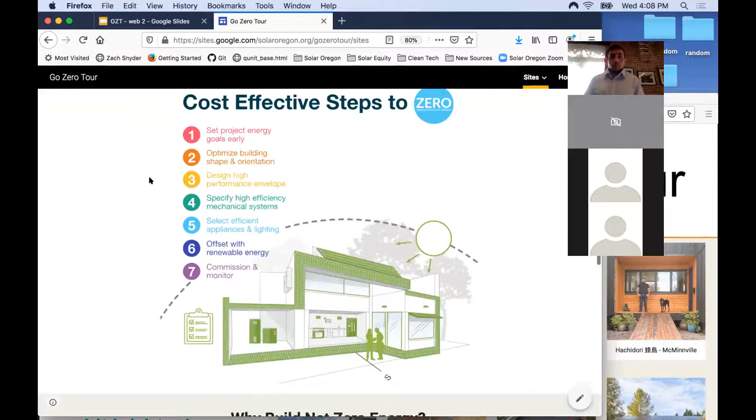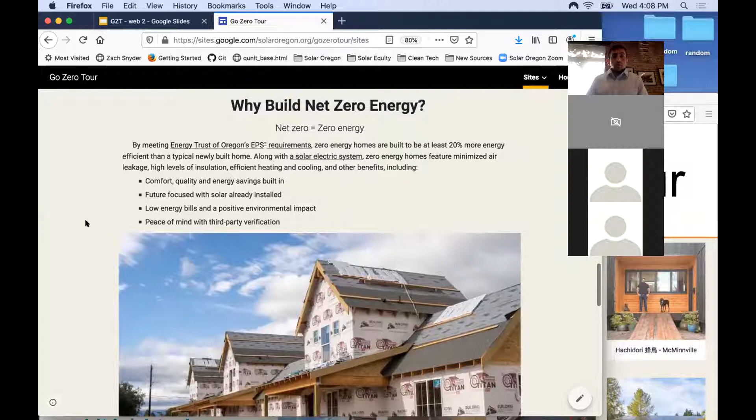So on the site, please check it out. Click on one of the tour sites to see what goes into this site. What are the technical specifications that make this zero energy? Watch the tour videos. We had an amazing videographer who we worked with this year, Keelan Booth, who put together a great visual guide to all of these sites. And you can also read the narratives as written by the site owners. So make sure you check that out.

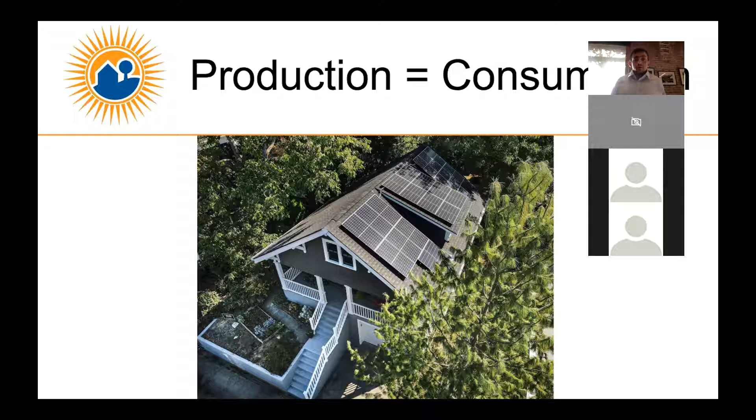What are the benefits of zero energy? One is that, of course, this may be the first one, the fore of your mind, is that when you're using solar to produce your energy and you're producing as much energy as you need, you're cutting out your carbon footprint. And of course, there's that environmental benefit. But there are other really great benefits that you may not think of top of mind when you think of zero energy. One of them is that it can be a really great investment.

A lot of people experience high energy burden. They're spending upwards of 100 or 200, sometimes 400, sometimes many hundreds of dollars per month on energy because they have older, less efficient appliances, because they have a home that is not air sealed in a way that allows them to reduce their energy consumption. So weatherization is often a great low-hanging fruit for saving money month after month. Solar is a great investment because it offsets what you're consuming from your utilities. So it offsets your utility costs, and over a long period of time can be a way to build wealth.

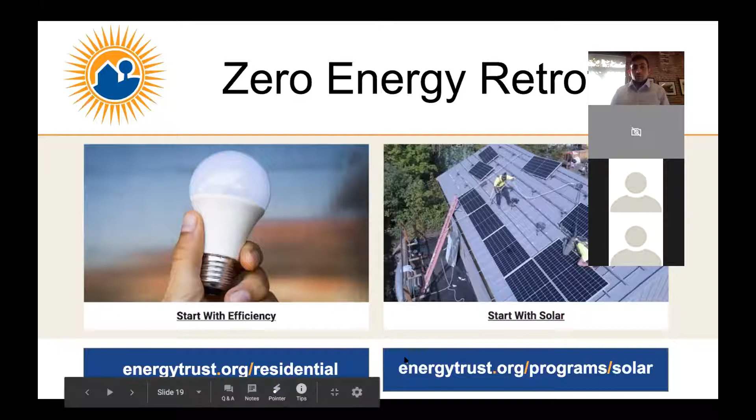And of course, when you are starting a project from the ground up, whether you're a builder or you're a homeowner seeking a new home, the design choices that you make from the ground up can have a huge impact on how much energy that uses. And it's really easy to design a new home that is zero energy. You can start with the insulation in the walls, how the home's constructed, making sure you have roof area for solar on a part of the roof that receives sun.

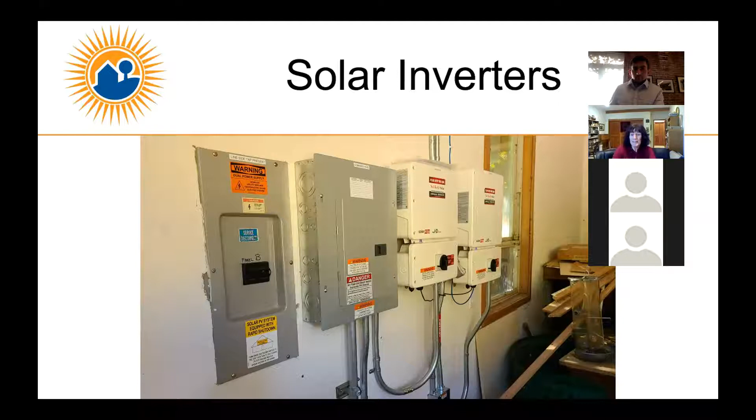And then right after that, the electrician stayed on and we went to the heating part of it and changed over everything in about 3 weeks. It was very easy. They did a lot of air sealing and duct work and crawl space work and put in a heat pump, and the 2 water heaters were changed out for a very large water heater that was run by a heat pump. And there were 2 Mitsubishi ducted mini split systems for the heating and an electrical upgrade for the stove. I did go to an all electric stove, and it was just a very smooth project.

I think now I'll probably look at going to batteries in about 5 years and see if they're more efficient and more economical. And I check my app all the time on my phone to see how much energy we're generating. And it turns out that even in the couple of weeks where we had a lot of smoke and where we've had rain, it's always generating electricity. And the app is very good in telling us also that we have offset well over 4 tons of carbon dioxide since August 6th, which is when the system went live.

Neil Kelly had PGE come in and they put in a bidirectional net zero meter, a monitor system. And that tells us when we're paying them and when we're storing electricity in the bank. And after getting my first PGE bills after the system was fully functional, I discovered that we were making perhaps 3 times as much energy as we were using. And this was at the end of the summer. So I'll continue to look at the PGE bills for a long time to see how it works.

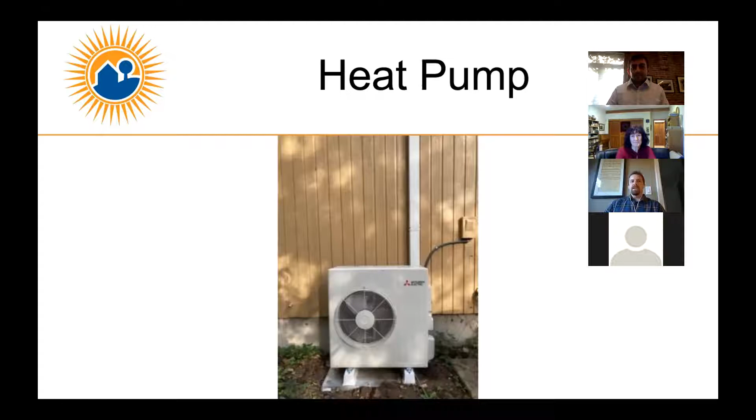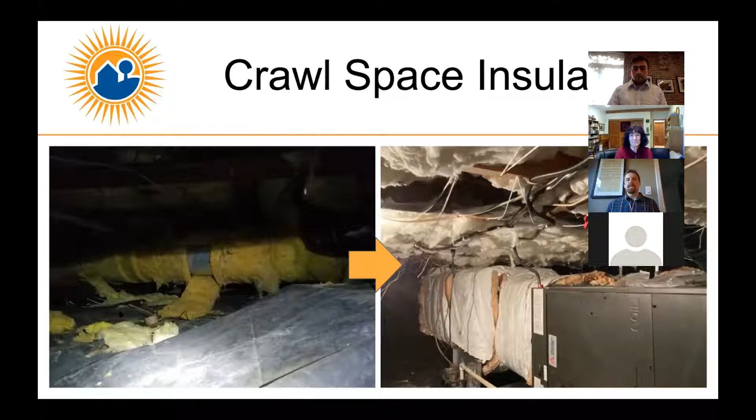And the insulation wasn't too bad. We did re-insulate the crawl space because the insulation was not in contact with the subfloor. So we got some energy savings out of the insulation there. We touched up the attic insulation a tiny bit, did some air sealing as well. So it's a multi-pronged approach. Home performance always is, and every house is different. So getting a home performance contractor in to help you create a roadmap of sorts for how to reduce the energy is definitely a big part of going net zero.

So that's kind of the home performance side of things. A lot of the low-hanging fruit was the heat pump water heater and focusing on the ducts. Those were kind of the big 3 where we saved a lot of the energy. And we were able to take the modeled expected energy consumption and cut it more than in half. I think we cut something like close to 60% of the energy consumption off of Gay's overall expected energy consumption. So that's remarkable. And then from there, we started designing a solar array.

And in Gay's case, she had a really big roof. I think the lowest spot was about 73% TSRF all the way up to about 80% TSRF. And TSRF is just the total solar resource fraction. So a really, really good roof. It's really large, as you can see, made for a relatively easy install of the solar array. And so we ended up putting in a 20.48 kilowatt solar array. We used SILFAB modules that are made in Washington.

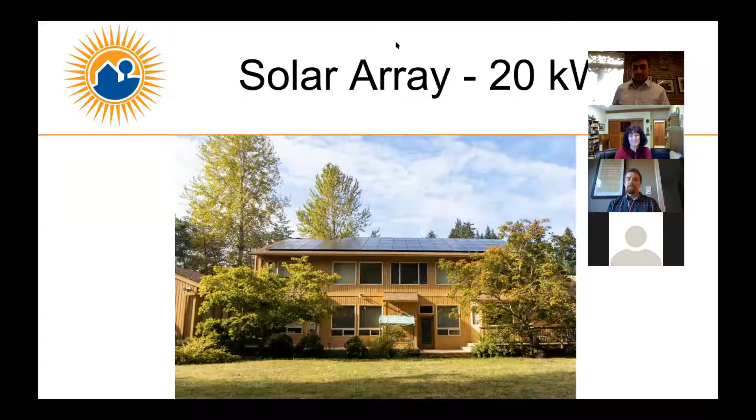And we put in 2 SolarEdge inverters. The SolarEdge inverters have the power optimizers, so each module is effectively isolated from the rest of the string. So if you get shading on one part of the array, it doesn't impact the production on the rest of the array. So an efficient heating system, the ductwork and the water heaters, and then a large solar array. And we were able to take Gay's overall energy consumption from, I think it was 212 million BTUs, down to 0. I mean, 0 energy consumption. So really cool project. Gay was really easy to work with, and it was a lot of fun to be a part of this.

That's amazing. Gay and Tyler, thank you so much. This, to me, is such an inspirational project, and I'm so glad to have it on the tour, because not too many years ago, zero energy was kind of a pioneering thing. And to see a home that was not designed originally with energy efficiency in mind, a little bit of an older home, not super old, but a big home, go zero energy, and it works from a homeowner perspective. It works technically. Nothing was invented for this project. It's all out-of-the-box solutions.

Off to the side, there's our heat pumps for both the house and the ADU. The windows are all triple paned with a U of 0.19. The most interesting thing about the house was how we built it. We didn't use traditional construction methodology at all. We use SIP panels, which are rigid insulation sheathed between 7/16 OSB for most of the walls.

Where there are structural components, they do have structural wood in there to support the ridge beams and other components. In the house, we have both 8-inch walls and 6-inch walls. The 8-inch walls are R42 and the 6-inch walls are R38. The roof is also SIP panels, 12 inches thick, and they are an R52.

We are heating and cooling the house with ductless mini splits. There are 5 mini splits in the main house and 1 in the ADU. And we're getting our makeup air and taking our exhaust air out with an ERV. And we have 5 heads in the house, each in each bedroom and 2 in the main room.

And as we go over, again, we're all electric. So we are also using an induction stove, which by comparison is far superior now to gas. It's more controllable, significantly more so. As far as cost, there's a lot of conjecture that building net zero or energy efficient is anywhere from 5 to 10% more expensive.

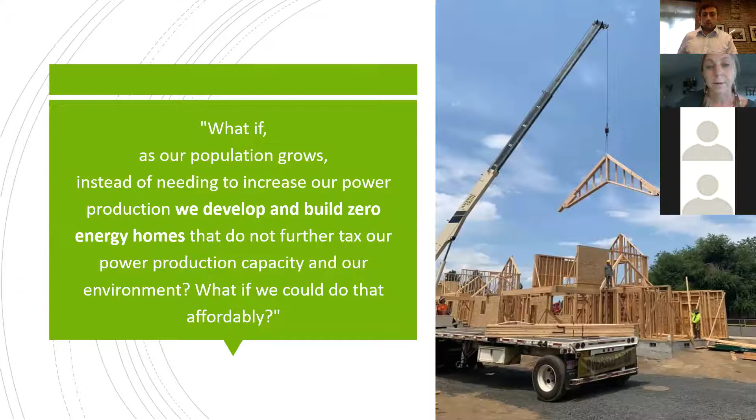In one of my energy generation classes, we were examining energy usage as it relates to buildings. When you look at consumption versus population increase over time, it begs the question: what if, as our population grows, instead of needing to increase our power production, we can build zero energy homes that don't further tax the power production capacity and our environment? We took this a step further and said, what if we could do that affordably?

So what are the benefits of energy efficiency to the individual? Zach covered some good benefits of energy efficiency, and I think these probably pertain more to the individual and the household occupant. So obviously there's a reduced or no energy bill. Another big one is that it insulates from future increases in energy costs. We are lucky in Oregon to have pretty low energy rates for our power, but that's not always going to be the case. And health and well-being.

So as I said, the third leg to our stool is equity. The lens we're looking at equity in, as it pertains to energy, is really in the context of income and energy equity. So we're asking the question, should these benefits of energy efficiency be afforded only to those with means? Or should zero energy be the standard sustainable way we develop housing for all humans? I personally think that zero energy should be the base building code.

And my co-founder in this venture, when we decided to create Kôr, we didn't start with the affordability side. We started with the zero energy side. And he said, well, I will only do this if it's not a product for the elite, if it's something that our peers can afford, who are teachers and essential workers, that kind of thing. We didn't want to just build these communities that only a small amount of the people could afford.

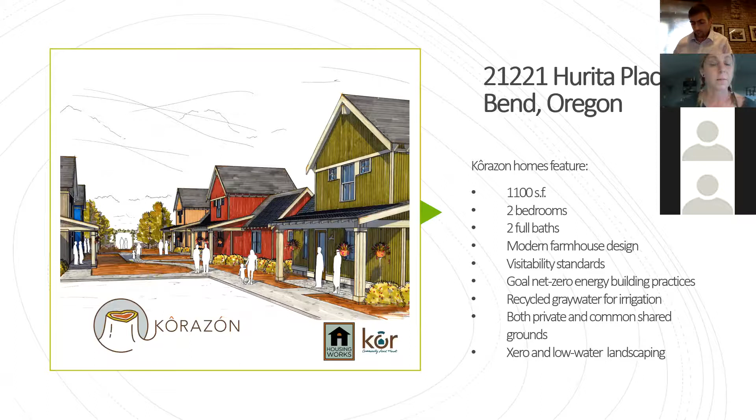The community was developed using a cottage cluster code, so it's centered around a common area that is shared, and we're hoping to water the majority of that with gray water reuse, in combination with some xero and low water landscaping. So how are we getting to zero? This is a picture, I think, from end of last week. So we have our roofing on, and we're starting insulation on Monday.

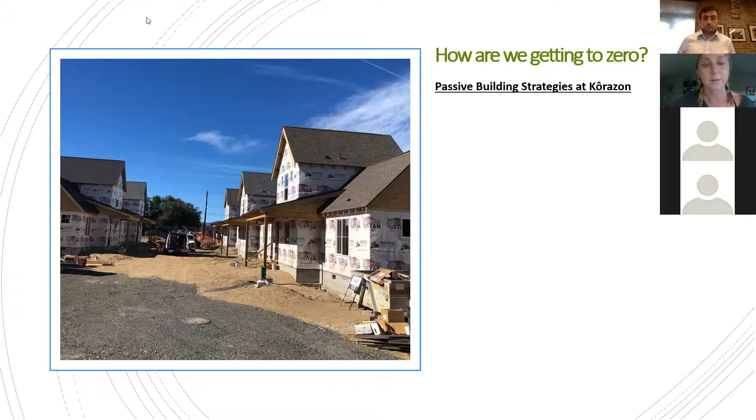We really started our quest to zero by doing as many passive things as we could, because we knew that these are the things that are going to last the life of the home. And as the organization that stewards the homes and the land in perpetuity, it's in everyone's best interest to start with passive. So for our wall systems, we went with staggered stud framing. For our insulation, that gives us about an R31. We started out in our energy modeling with higher insulation in the walls; we were looking at about 1.5 inches of spray foam and then blow in.

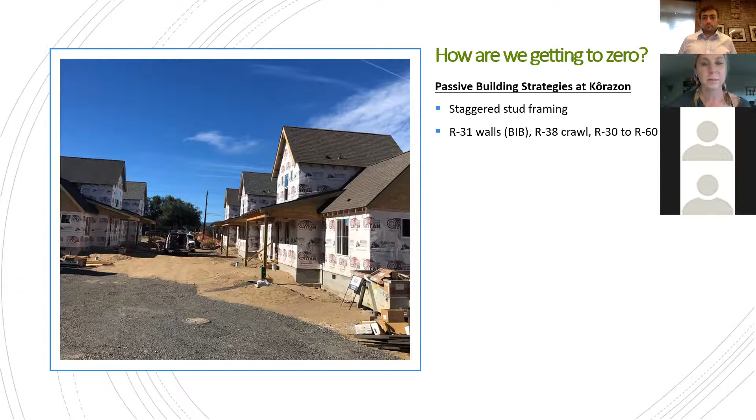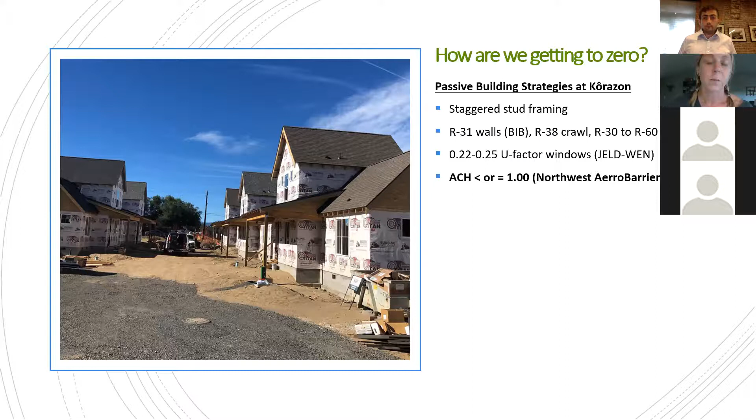After modeling the AeroBarrier product and where that put our air changes per hour, thank you, Perry, for the introduction to the AeroBarrier product, we were incredibly surprised at how much less insulation we needed to get to our zero energy goals, just by making a tight home. We have windows that are of U value 0.22 to 0.25. With AeroBarrier, we've modeled 1 air change per hour, but our goal is for less.

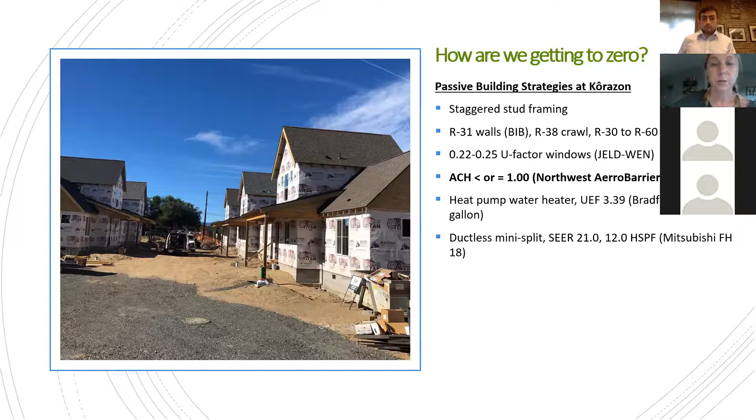We're using heat pump hot water heaters and ductless mini splits, and because of the small nature of the homes and that they are so insulated, we worked with Bruce Sullivan from Base Zero and Mitsubishi to establish that we really only needed a one-headed system as long as we had a way to transport that air to the different spaces. We have in-wall ERV systems, 100% LED lighting, and energy efficient appliances. For our active system, everything we could not cover through our passive strategies, we have a 5.12 kilowatt solar array that will go on the roofs.

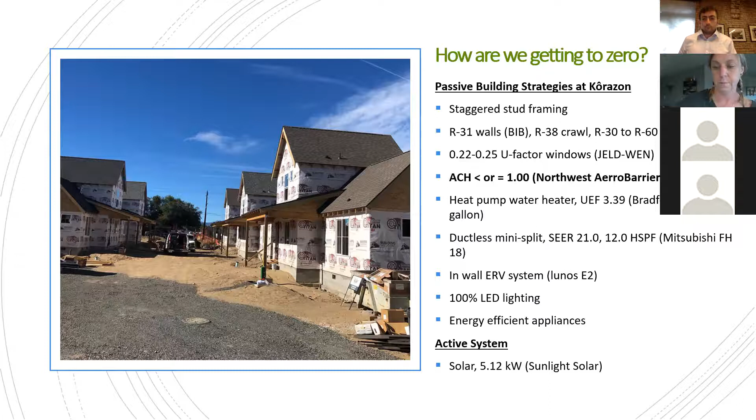So how did those passive building strategies change our energy profile? You can kind of see here the difference between what a minimum code built home was modeled at and what our Kôr homes are modeled at after the upgrades. And the percent difference was about 43%, which we were pretty happy with.

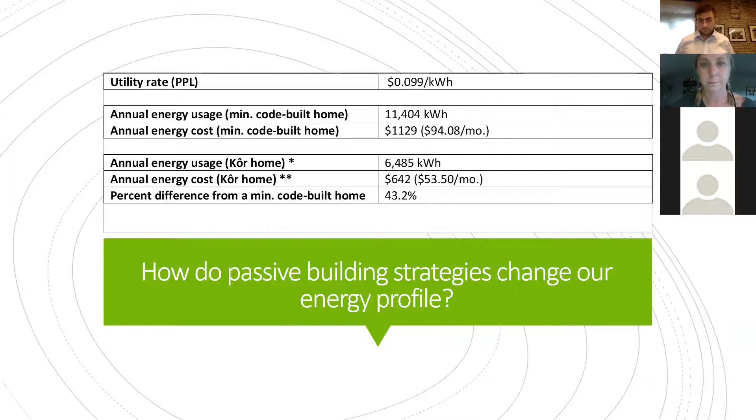One of the big ones, our framing lumber: our local lumberyard, Building Solutions, went out and got our whole framing package for us at cost. The difference just in that saved us about $25,000 in the 5 homes. They also helped us with the windows and the doors, so the total was right around $40,000 that they saved us.

Now, not all of that was directly related to energy, but if we're saving in our general building envelope, we can put that money towards some of these upgrades. So for each house, it was just a little bit over $30,000 total upgrades from a base code house. And we've raised a lot of that. Not all of it quite yet, but the solar is going up regardless.

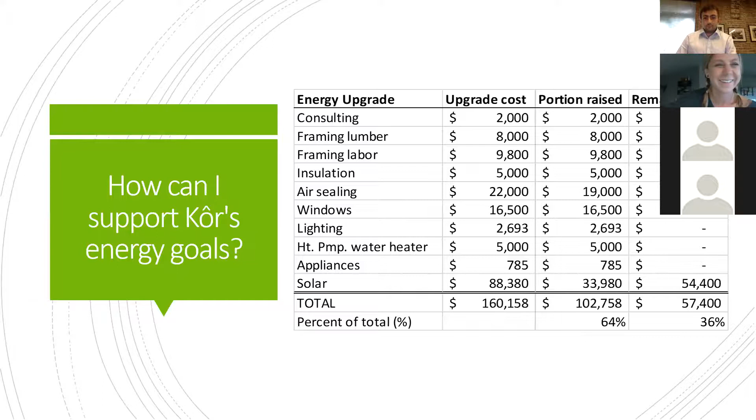That's fantastic. Thanks, Amy. Yeah, I think that your site is so clearly centered around humans and the experience of the people who are going to be there, and that really permeates everything about your organization. That's probably the beauty of the Community Land Trust in general, and partially what you personally bring to it, and your perspective and framing when you started Kôr.

But this is so exciting to me to see examples where zero energy is accessible, and it's not just the community land trust side, which is a big part, and all the design aspects that you brought to it, but these folks won't be energy burdened, right? They're going to be saving there. It's not just the upfront cost of the home; it's the cost of living in it too. And so these benefits of zero energy are massively powerful and important when you bring them to actually addressing human needs.